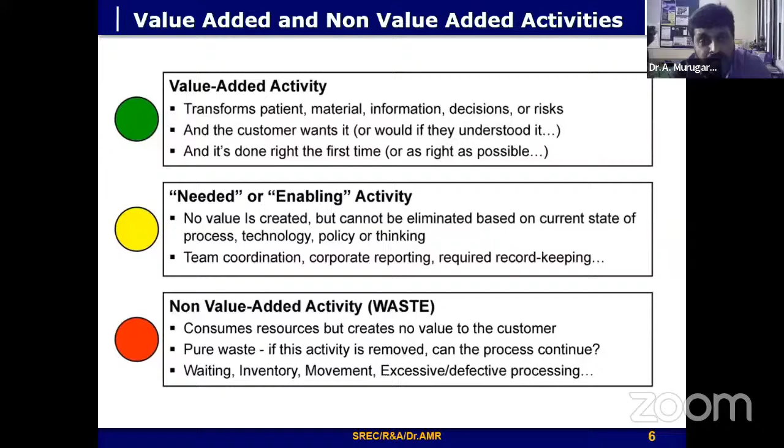Defects also. How are we going to avoid defects during your process, whether inline or in-process conditions, what kind of monitoring system, because unnecessarily a person comes to take a traditional way of making a measurement and inspection and making a report. These things are not value-added activities; they're non-value activities. It's always wastage. How are we going to minimize this activity when we take a list of processes, a list of steps involved in converting a raw material to a product? That's how we are going to categorize it.

As I told already, the pure wastages, you have to categorize into pure wastages. And the activities which transform directly into the product, maybe a shape or whatever, how you design and manufacture your component, are directly linked to the customer's point of view. The customer asks for a pizza with different flavors, maybe cheese pizza or something. So how the company produces directly whatever the customer wants.

They manufacture it just in time, it's collected by the Swiggy operator, and finally it reaches your place within 20 to 30 minutes. That's how lean principles can be used in Swiggy and so on. Then the other, incidental work, is maybe the technological changes and the thinking of sorting the steps involved. That's called incidental work. Generally these things are very important, but the thing is how we are going to minimize them. That's how we talk about value and non-value activities.

For example, we take the iron bar and store it in temporary storage. We want to machine it for some processes. It involves cutting, welding, milling, and painting, and finally goes to delivery. But the thing is, it is in the inventory. The customer needs only two components, two iron bars, but the inventory may be huge. So how are we going to categorize those activities? That's one of the major ones. That's where you have to start from.

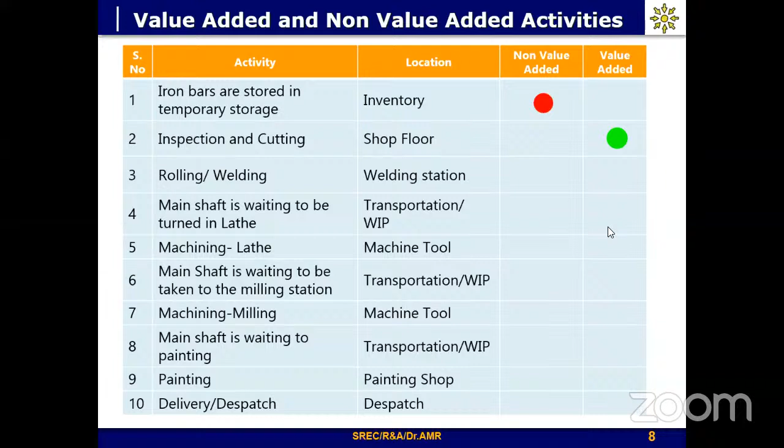That's why. Okay. I think you have to categorize into non-value added and value added activity. So it starts from the inspection, and cutting is a value added activity. Similarly for rolling and welding, whatever you have to connect it, that activity is also a value added activity. Then it goes to the next operation, so the particular component has to be waiting for some time.

Because the component we already pre-processed, we cut and inspected it and did some kind of welding, whatever the requirement. So it may be waiting; it maybe goes for the next operation, machining in lathe, but the thing is we have waiting time. So how are we going to minimize the waiting time? Waiting in between one station and another, or process one to the second process, that time and the cost is very important. How much time is waiting and relatively the cost involved, and also the number of quantities.

So based on this, that activity we call transportation or work in process, always called non-value activity. Then the next thing is machining on the lathe. Once it is loaded in the machine tool, the lathe, it's performing a job. It takes 3 to 4 minutes or 5 minutes. Once the job is over, that 5 minutes activity and the relative cost are called a value added activity.

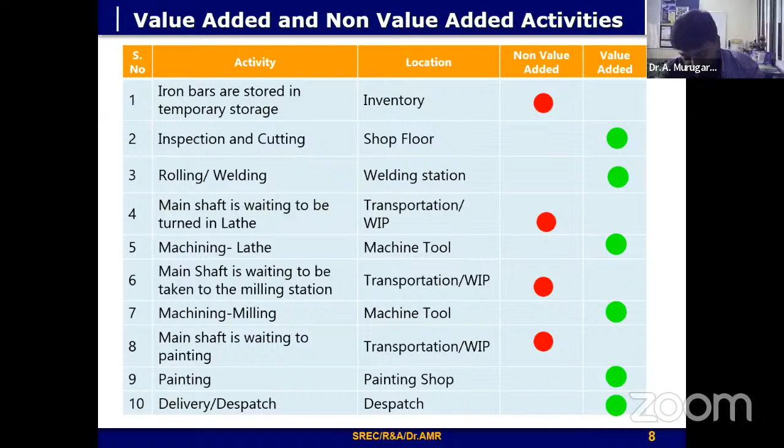Here I'm talking only from the inventory to the dispatch. So almost 4 to 5 non-value activities. But how are we going to reduce those activities? That's one of the major questions here. This is a simple example. Like that, whatever activity you are listing, you have to categorize into value added and non-value added activity, and work out what percentage is consumed by non-value activity. So come to it from this particular point of view.

So why do we have to go for lean? That's one of the major questions. Why, sir? Because of n number of technologies. If I want to go to Chennai, I can use my car, I can use a bus, I can use a train, I can go by airplane. I can go by any mode, but how? Which way should I go? That's why lean.

Because based on your cost, your time, and the resources you have, you have to choose effectively what's in your pocket. That's one of the major points here. That's why we're going for lean. There we have been talking about anything that adds cost to the product without adding any value.

But the thing is, Ford started in 1913 and 14 itself. Ford started with the synchronized way of assembling the Ford cars. They started, but they started in a different way. In the 1950s, Ohno from Toyota started with the lean principle: how we are going to manufacture your component while minimizing the waste. That's where lean came from, a method of making a manufacturing process more efficient.

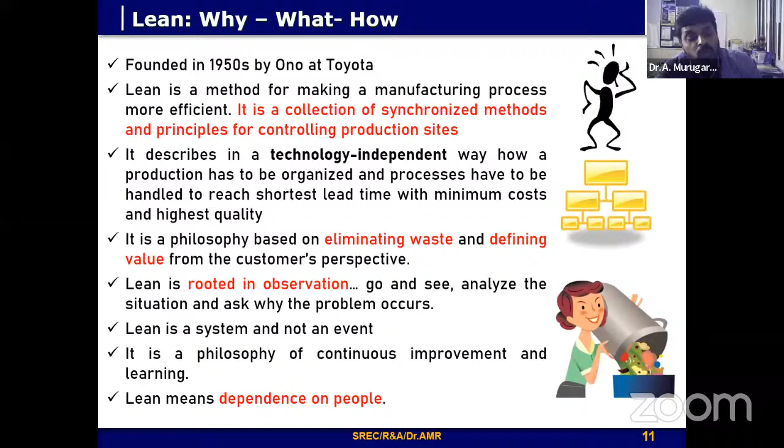So when you go with lean, it mainly depends upon the people. Whatever your technology, observation, methodology or tools, it depends upon the people how we use the lean principle in any kind of activity. There are a lot of stories. Lean manufacturing is a systematic approach to complete in the shortest cycle time, eliminating waste from the process. These are common definitions; n number of definitions are there.

But ultimately, it focuses on eliminating the waste. The main principles of lean focus on zero waiting time, that's very important, zero inventory, internal customer pull instead of push, and reducing the batch size. When you are scheduling, how you are going to reduce your batch sizes and process times, that's mostly what we have to talk about. One of the major problems here is when we go to industries, studying and observing their process, we want to run some kind of automation.

Suddenly the people who are working there, they want to remove their people. So that's what eliminating the people means. The problem is, recently I have visited some of the companies in Coimbatore. There they have been talking about 4 to 5 people working on dispatching and loading some of the components. But they need assistance of some kind of machines to reduce their work. So they're thinking a different way, and we have to implement some kind of low cost automation, because the industries are mainly looking at low cost automation, because they cannot find the people.

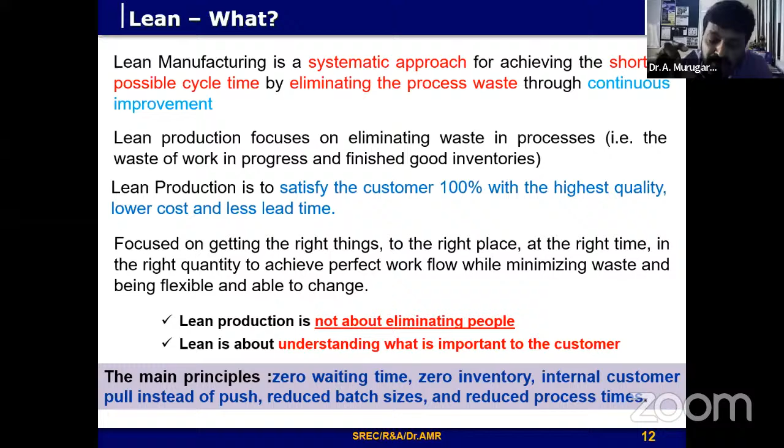But ultimately, lean manufacturing is one of the thumb rules for most of the industries. They started 3 to 4 decades ago and they're working on this, but there's still a long way to go. As I told, only 1% to 10% of industries have started working on lean manufacturing, lean automation and Lean Six Sigma concepts. Okay, come to the

When you're talking about the optimist point of view and the lean manufacturing point of view, the optimist always says the glass is half full. But the pessimist always says the glass is half empty. But from the lean thinking point of view, we always ask why the glass is twice as big as it should be. So from the lean thinking point of view, you should think in this way.

You have to start observing the existing system. You should think about minimizing your waste, because you are consuming only half the amount of water. So why can't you manufacture a glass with a size of 10 ml or 15 ml or 200 ml? If we take a 100 ml glass and the person is only consuming 60 ml, the remaining 40 ml of the glass is wasted cost and resources. So this is where you have to start lean thinking to implement in any kind of process.

If you go to any food industry nowadays, they're talking about dosas also. Dosa sizes are varying, at the same cost, but they're making them differently. So this is what they started on. Just one example like that for the manufacturing industries: they're looking at fixtures, single minute exchange of dies. There are so many exchangeable dies and just-in-time concepts they implemented. This is the way they're talking about lean thinking.

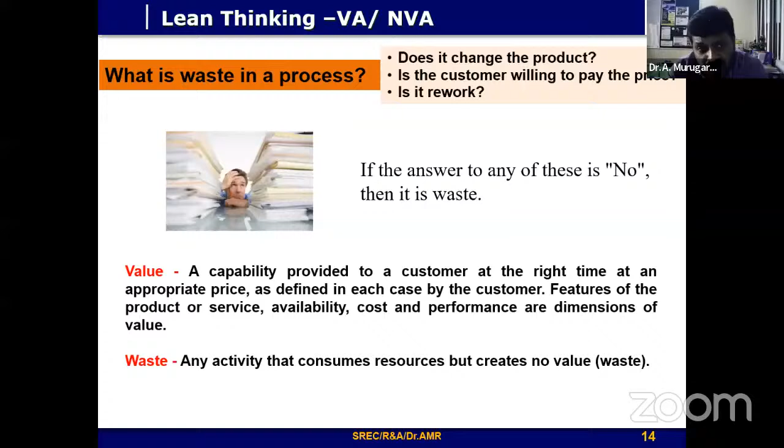So we have to talk about this waste in the process, when talking about value added and non-value added activity. As I told you, we have type 1 and type 2 activity when I'm talking about the non-value added. Type 1 we can eliminate immediately, but type 2 activity cannot be eliminated; we have to analyze, study, observe, and finally reduce. That's why we have to categorize the non-value activity.

Generally, the thumb rule is that whenever we look at the process time of any component, 95% of the total process time is non-value added activity. How are we going to reduce this non-value added activity? Minimizing your wastages is one of the major ways.

So there are different kinds of representations of value added and non-value added, from my perspective: valuable effort, cost, time, money, its value. Sometimes we have to categorize into totally pure waste, maybe less effort, but how are we going to minimize its waste? That's the way they categorize into value added and non-value added.

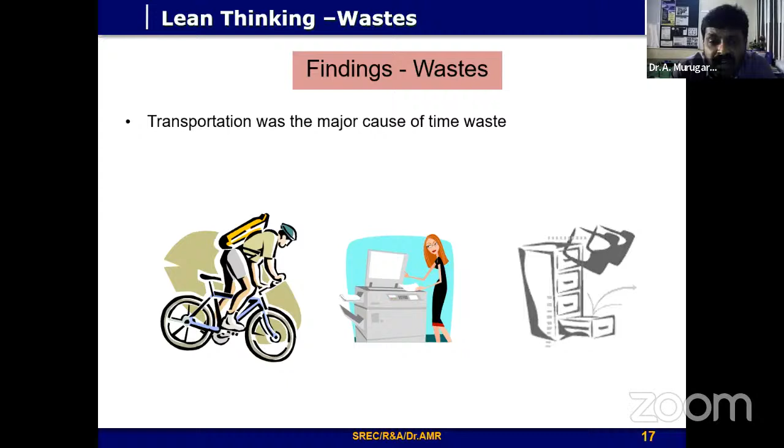Okay, so come to lean thinking. How are we going to find the wastages? That's one of the major questions here. When we are moving material from one location to another, the major time is the person who's handling, the person who's transporting, and the time spent by the person. Because the cost is involved for the labor, the material movement, the machines, transportation is a major thing when talking about wastage. You see that example most of the time.

Yeah. So, as I showed in the previous example, most of the time transportation is the major cost. And the duplication of hard copies and filing wastes paper, staff time and storage space. This is one of the major ones, even in our career, in the education sector also: the duplication of n number of hard copies.

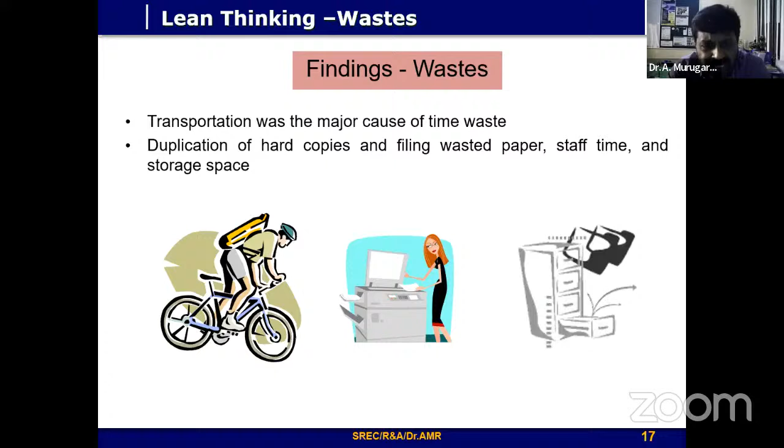So think about the paper wastages, and how we are going to implement the entire e-paper concept. Whenever you need, you have to take it from the different reports and other things where you need it. Otherwise, you take it from online itself. That's what they're talking about, the most important way of finding the waste.

Okay. So the next thing: we generally call it 7 wastes, but now most industries have added one more waste, underutilization of people. This is also one of the wastages, because we are not utilizing your people properly, if we are talking about lean thinking. Then generally we have overproduction: the customer needs some amount, but we are producing more than that. That's called overproduction.

Inventory is one of the most important factors. Then, as I told, waiting time, motion and transportation. Rework is somewhat okay, but we have to design your components in such a way that scrap can be handled differently and used for other purposes. Rework is also another important one. If you produce as per your design, there may be possibilities of rework, but it's less time, fewer things only.

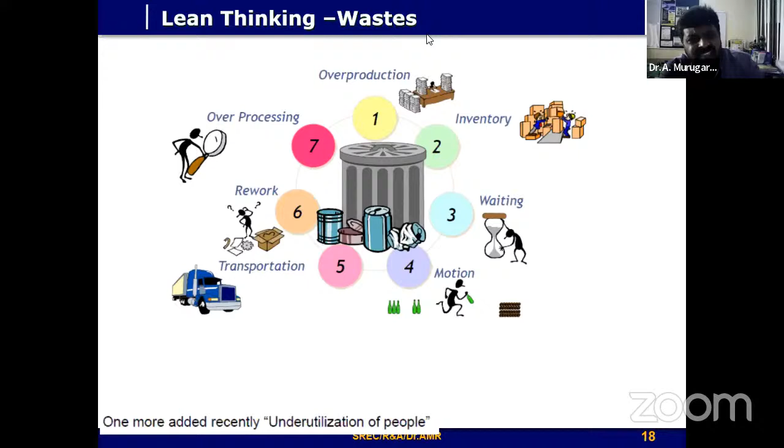The other one is called over-processing, another important factor when you're talking about lean thinking in wastages. There are generally 7 wastages. We can say 7 mudas also.

When talking about lean thinking, or lean manufacturing, work study comes into the picture because in work study we want to identify the unwanted elements and unwanted time spent in your process. That's the common ground between lean manufacturing and work study: the motion involved in processing steps, utilization of people, time spent waiting for components to be processed, and transportation time.

Apart from that, lean manufacturing also concerns overproduction, inventory storage, and number of defects, which are not directly discussed in work study. In work study, we mainly focus on time and reducing the unwanted activities and elements present in the system. Work study is one of the major processes used in lean manufacturing.

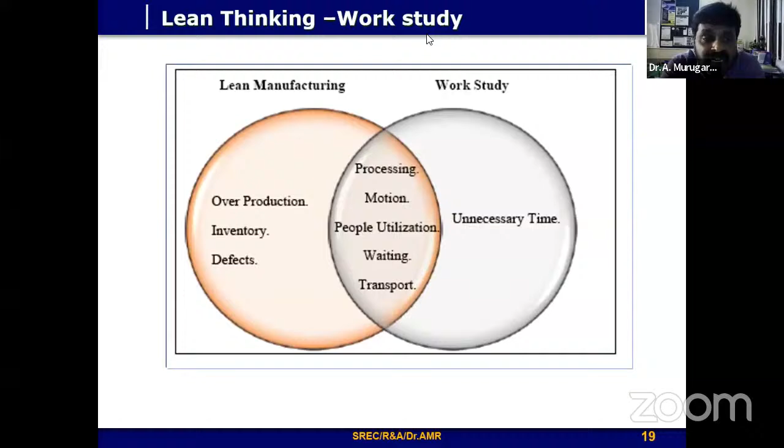This is one small video showing how lean management and lean principles can be used in a business, for example a food industry business that is doing well and thinking of expanding. That's great, but it's also the riskiest time for a business, since many businesses don't survive the transition.

Should you throw money at the problem by investing in new equipment or hiring more people? Should you make your staff work more overtime? Your answers to questions like these can make or break your business.

And that's where Lean comes in. Lean is a philosophy about delivering value from your customer's perspective, eliminating waste, and continuously improving your processes. Lean can radically change the way you do business. Lean management is based on four principles. The first principle is pull: rather than producing as much as possible, customer demand pulls goods or services through the manufacturing process. This minimizes overproduction, inventory, and ultimately working capital.

The second is one-piece flow. Focusing on one single piece at a time minimizes work in progress, process interruptions, lead and waiting time, while increasing quality and flexibility. The third is takt, the heartbeat of a lean system. It's how fast you need to manufacture a product to meet customer demand. Takt allows us to balance work content, achieve continuous flow, and respond flexibly to changes in the marketplace.

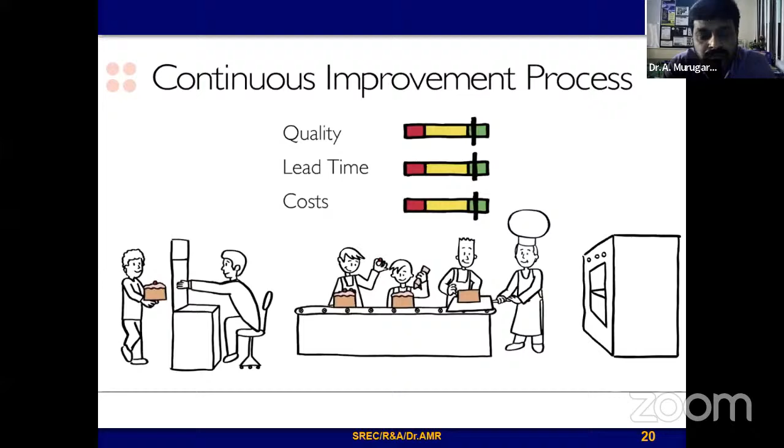And the fourth is zero defects. Mistakes happen, but a lean company doesn't pass on defects; mistakes from previous steps must be fixed before going on. Combined with a robust continuous improvement process, the four principles of lean management will help your company stay ahead of the competition in a constantly changing marketplace. So if you're ready to begin your lean journey, contact us today.

So this is just one video to help you understand lean manufacturing. It covers overproduction and how you achieve one-piece flow in producing your product, and how you reduce wastages based on how you fix your machine tool. For example, if I want to machine a 5mm diameter part, I can't use a big machine tool; instead a small machine tool should be used to fit the manufacturing need.

So you have to schedule your activities to fit whichever process suits the need of the customer, whether the customer expects high accuracy or a high precision component. Based on the requirements of the customer, you have to design your layout and system. That's what most companies nowadays look at in this particular aspect.

For example, we have only a small space, even in construction companies we have a small space. How we are going to construct depends on the requirements of the customer, whether it's 2 floors or 3 floors, so you have to fulfill the requirement of your customer and design the layout accordingly. I have already constructed a number of houses this way.

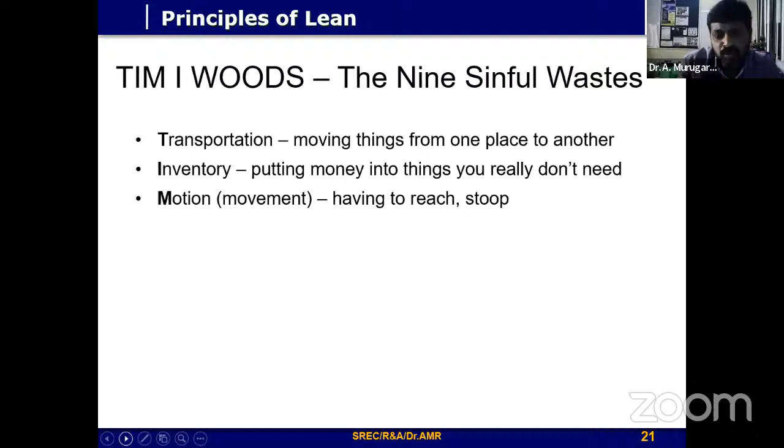So that's one of the major principles of lean, when we are going for lean in industries this is a major one. Nowadays they're talking about vision systems to capture movement, and finally it may be converted to automation. When you're going to make automation, the motion, how we use our hand to do the operation, instead of that robots, that's where robotic lean automation comes into the picture. So robo-motions are mostly using our hand aspect, they are making this happen.

But the thing is the inspection has to be visual, with a single orientation, so how many observations we can make using your camera. Even though the cost is involved, if you make the entire investment in cost, the end result may increase your productivity and minimize your cost. The initial investment cost is very high, but in the end result, the cost of production will be minimized. That's how they talk about inspection, because the rejection rate needs to be reduced, and we can easily identify defects, with which we can go for rework or reuse.

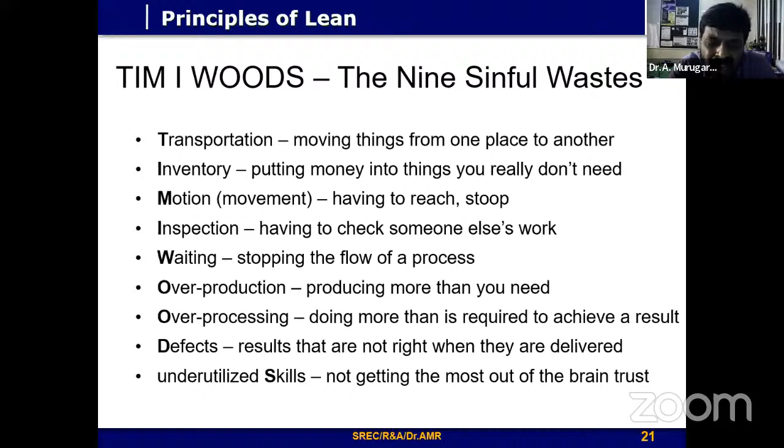Then the final one - underutilized skills. Whatever we've been talking about regarding implementing lean, the major problem is how we utilize the resources of the people. Lean mainly addresses this, and underutilization of skills is very important. How do you trust your brain, because we're developing the system, producing, designing - but how does it affect the end result, how do you fulfill and satisfy your customer? As a producer, you should think from the customer's perspective.

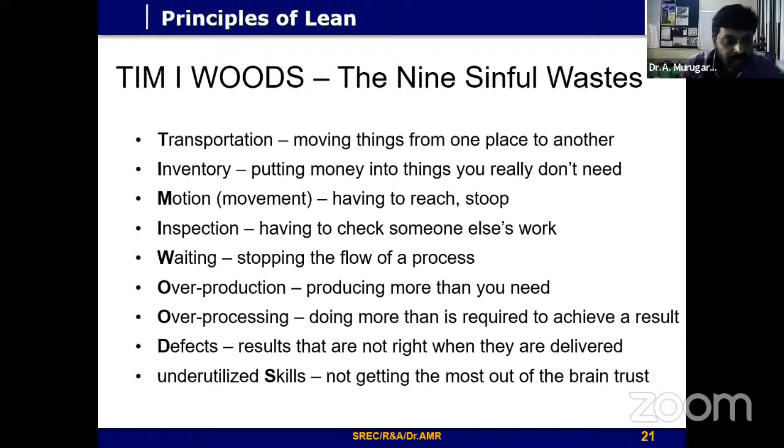So these are the 9 sinful wastes - generally we're talking about the principles of lean. Next is the same concept already discussed when talking about principles of lean: the 9 sinful wastes, also called the 7 Mudas or different types of waste.

As I mentioned - defects and rework, transportation, motion and unnecessary walking, waiting and searching for the right component or finding the component to load into the system, inventories not properly analyzed, overproduction, and ineffective processing. Sometimes the process is under or over processed, and in those situations we cannot go for rework. That's how they look at the principles of lean from the 7 Mudas point of view.

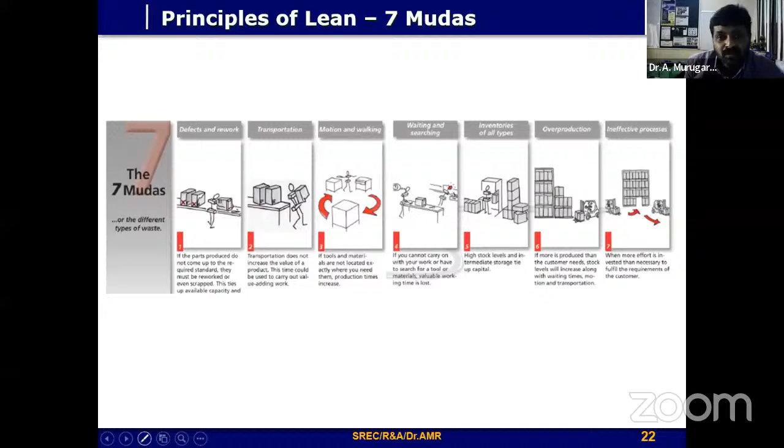The same principles - transportation, inventory, motion, waiting, overproduction, and over processing - because sometimes the same process gets duplicated. For example, if you're making a turning and drilling operation, instead of completing the drilling process separately, you can couple the turning and drilling process together. Otherwise you end up waiting and repeating operations unnecessarily.

Then defects and skills - one of the major issues here, because underutilization of people's skills, and people who don't listen, cannot correct their mistakes. These are among the major problems when looking at implementing lean.

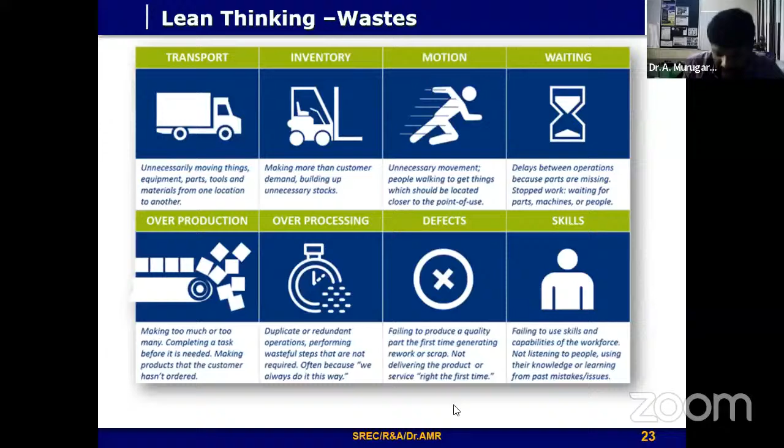So the next point is the same aspect. I'm repeating this slide because from the industry perspective, in today's technological Industry 4.0 context, most industries focus on transportation and motion, and another important thing is waiting - because processing, inventory, and overproduction depend on each and every company.

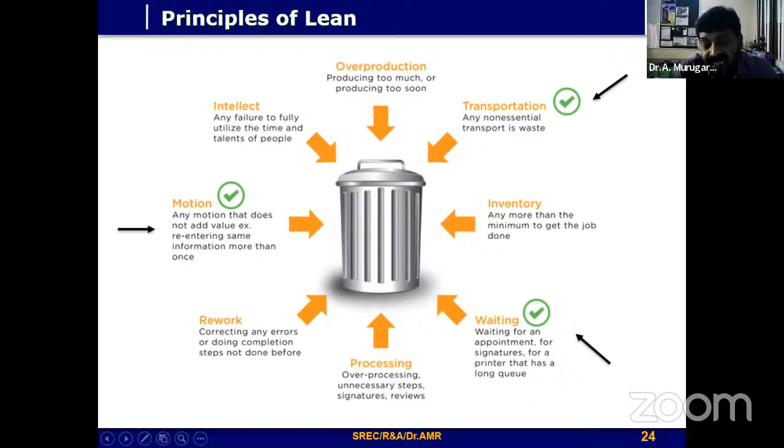But the thing is, most of the time, wherever you are doing any kind of activity, transportation is involved and motion is involved, and the time for waiting is another major one here. So how are we going to minimize these things? These are the 3 major points we have to consider when going for lean deployment in the industry: transportation, motion and waiting period.

For example, see the person who is ordering some kind of burger. What are the processes involved? What does the customer have to pay for this burger? Because the burger is around 60 or 70 rupees, so the person makes a profit. But what are the things there? He has to get raw material, then supporting accessories and electricity, then the person who's inspecting and taking the order, then you have to invest something in advertisement. So many factors are involved.

But which critical factor significantly affects the cost of your operation? Operation cost is what you have to look at, where you have to take your cost, and other aspects like whether your employees are trained or not. Then among this you are going to make your profit. So starting from the burger itself, n number of shops are coming up nowadays on each and every road, but how are they making a profit on each and every burger?

Sometimes small mobility vehicles are coming into the picture. Instead of renting the shop, decorating all these items and wasting money, how about mobility? So now they're thinking in a lean way to attract the customer: you don't want to come to our place, I can come there. From your place you can order it. We can prepare it. We can give it to you freshly. So like that they started.

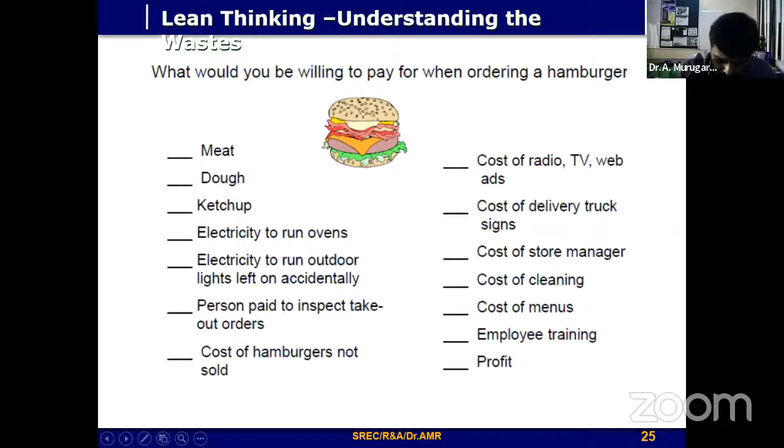There also, if a nurse is not available, automation systems are coming into the picture. They install a lot of temperature devices to check your temperature. Then it's reported to a page, not in printed format. Nowadays doctors are using a tab: once you are registered, they scan it, it goes to the report, and when you enter and say your name, it automatically displays all your items. Then taking all this information, they give you a prescription. So the lean way of changes is happening.

So these are the wastages and their types. What are the causes of these wastages? Then what are the symptoms? Because mostly when we talk about wastages, they range from overproduction to unnecessary over processing and underutilization of labor skill, everything comes into the picture. Okay, so this is what we mostly have to concentrate on in this particular dimension.

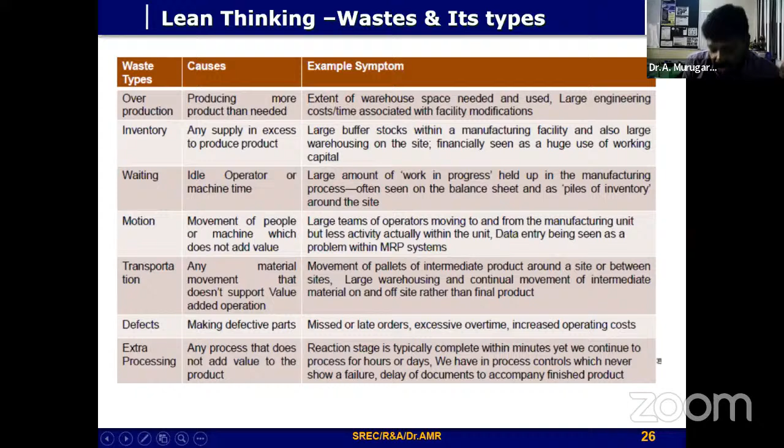So from the lean thinking point of view, you always have to define the value, because you have to identify the value of what the customer expects, what the customer expresses, and you have to map the value with your process, and wherever it is possible to eliminate, you have to eliminate it, and finally you are going to create the flow. In the flow you have to identify what steps are involved, making a smooth flow of your process without any delay, and you have to push it to the pull system where the demand occurs, then it may be serviced. Then you have to go for perfection.

So once you are established, you have to establish your pull system, because based on your order, you have to start your process. Then you can service within the minimum time, just in time, the minimum time at which you have to prepare it all. Because if you want a burger, you have to have your bun and other elements to be cooked. Then finally you have to process it. If the customer is asking for a burger with cheese or a burger with chicken, you have to have it all ready.

At this time the quality is also very important, which you have to look at. And finally, you have to serve the person within 3 minutes or 5 minutes, where the customer is expecting good quality and lesser lead time in getting their product. This is mostly what they're talking about from the lean thinking point of view.

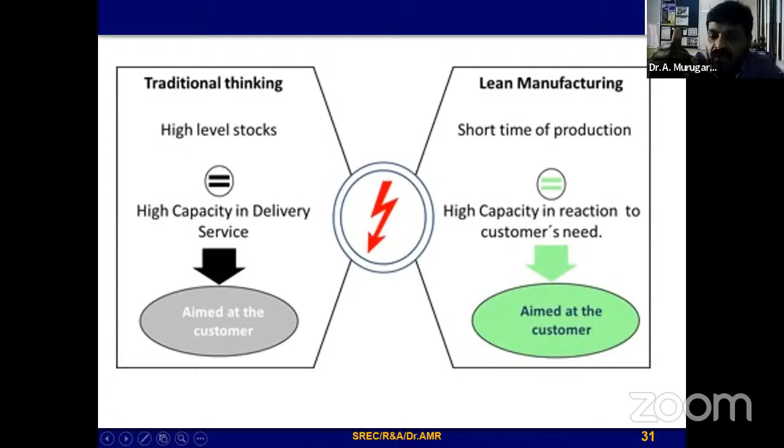That's what we're talking about here. When talking about cost, the cost involves activities which are essential, value added, and waste. So by minimizing your waste activities, you can get your maximum profit. That's what they're talking about in the cost reduction principle. In traditional thinking, we are not aiming for the customer, we are only looking at what we have and how we are going to sell it to the customer. But in lean manufacturing, we are aiming for the customer, reducing the time and the way we use our system, minimizing the wastage while fulfilling the customer expectation.

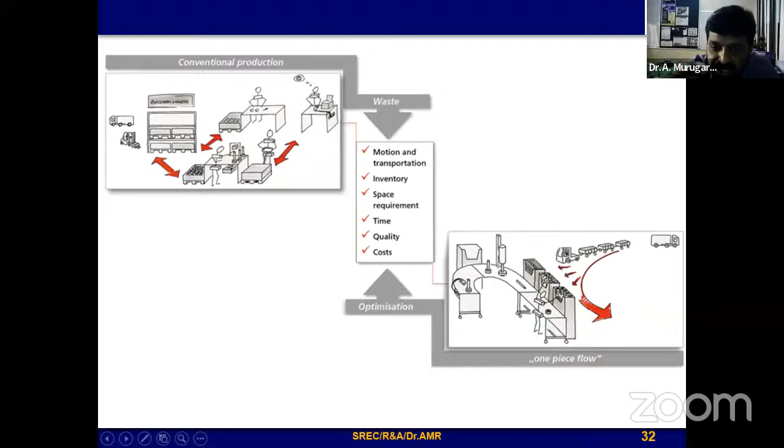So that's the conventional production system, where each and every station is individual and independent. But the thing is, what happens when you are moving from one location to another location? Instead of that, your labor should be changed according to your requirement, based on how you are going to optimize your workflow, your motion, transportation, inventory, space requirement, time, quality, and cost.

So far we discussed the principles of lean, but finally, coming to how we are going to implement lean, that's how you're going to make a lean deployment in industry, in particular, what are the various lean methods and tools.

I think I have somewhat touched on all these concepts, but these are the major methods which have been used in most of the industries, maybe with a combination of these, or maybe some specific method from Poka-Yoke or SMED, single-minute exchange of dies, depending upon the industry. They have a combination of all of this.

Now each and every industry is looking at it from a different perspective. I went to some industries, like Craftsman Automation in Coimbatore. They may be focusing on the Kaizen principle, change for better. So if the process is going on and the changes are for the betterment of your productivity, they immediately ask to change the process. That's the way they started.

Every week they ask the people to discuss. Suppose I'm placing a tool here, instead of placing it in the particular station for use in the next one, you have to change it immediately, like that. They started change for the betterment. So that's the way they are using this principle. Every team is working on this particular aspect.

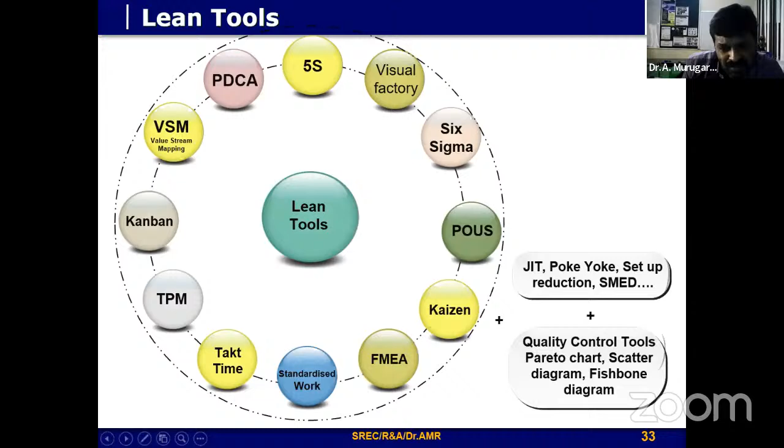We already talked about that. VSM and Six Sigma are now emerging like anything. TPM is also included in Six Sigma. That's not a big deal, because total productive maintenance already evolved a long time before. So the concepts we are talking about already happened a long time before. So these are the various tools when talking about lean tools and methods.

Standardizing the work, that's the work study: breaking down your jobs into a number of elements, examining them, and finding out which one is an unwanted activity. That's what work study does here. It's a combination of method study and time study. Then workplace organization, the 5S concept: sort, set in order, shine, standardize, and sustain. Most of the industries are already using the 5S concept now.

But still, the problem in India is proper training and the visual factory. Now, with Industry 4.0, these are all being done in a different way. My next slide will talk about Industry 4.0 and how this all comes into the picture. Then point-of-use storage is another important factor here.

Most of the time, the location of parts and raw materials is the most important, and their proximity to your process station is very, very important. Most of the industries are struggling to identify the location of parts. That's why nowadays they're talking about a lot of scanning systems at different locations, so they can see where the particular product was ten minutes ago. Like that, they easily identify it using a number of smart sensors.

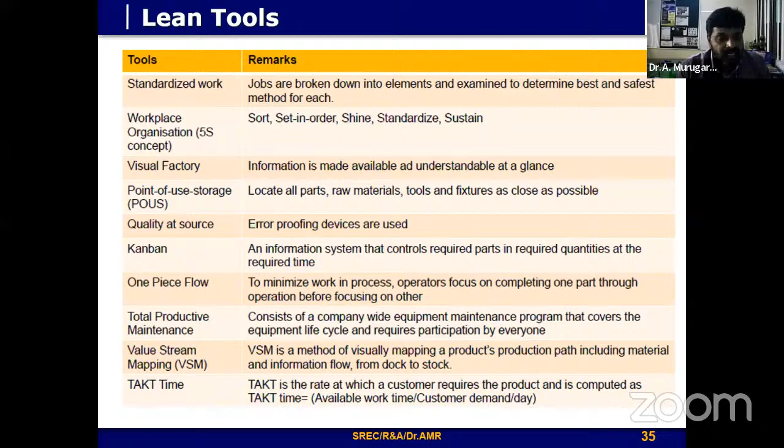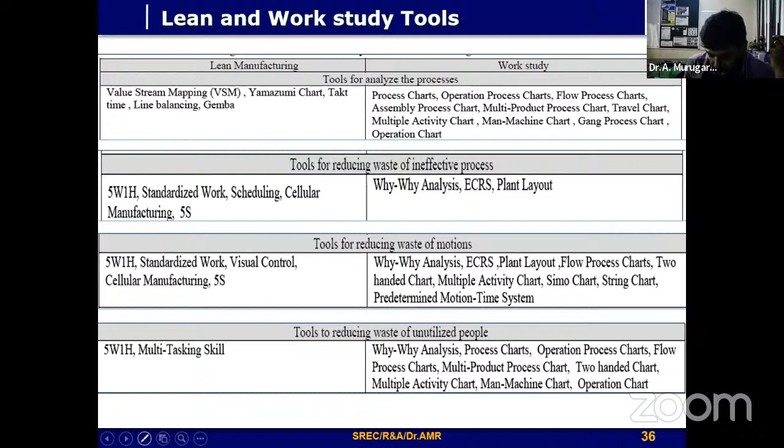Okay, so that's what we're talking about with lean manufacturing, combining it with work study. So the tools for analyzing the process and tools for reducing your wastage based on the different principles in lean manufacturing, in work study, and wastage of motions. Similarly, you can use 5S concepts, and you can use different process charts and tools for reducing your unutilized people. So those are also important working concepts, along with why-why analysis and process charts.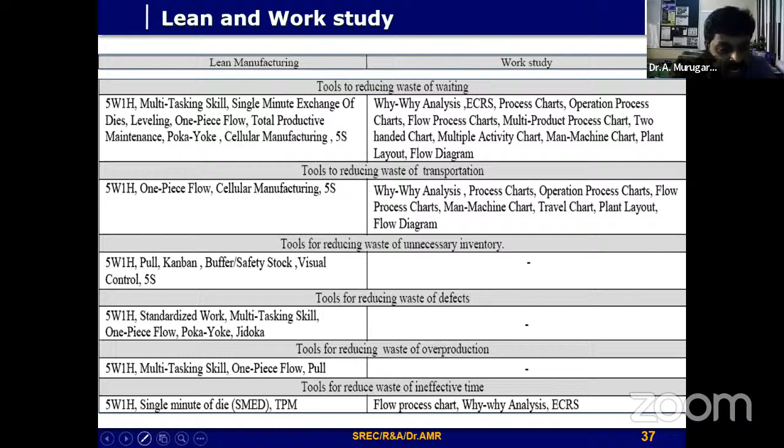So if you're comparing lean and work study, how are you going to reduce your waiting time, your transportation time, your unnecessary inventory time? So like that, we can use any number of lean concepts like Poka-Yoke, one piece flow. So like that, they started implementing the concept, in particular zero defects, zero maintenance, TPM, and jigs and fixtures, exchange of dies come into the picture.

So the lean tools are 5S and visual management tools. I think most of you already know about these concepts. The 5S tool: sort, set, shine, standardize and sustain. Then the other important tool is value stream mapping: the information flow, material flow, and lead time between your processes. This is how we reduce your lead time and your process time for delivering to your customer. It's a holistic approach to the entire current state system, because it indicates where the wastages come into the picture.

So value stream mapping is an important one. Everyone should know it; those who are working from a research perspective, in R&D, are most of the time working with VSM. A lot of software is available, and we conducted some lectures on VSM alone, 2 to 3 days of training.

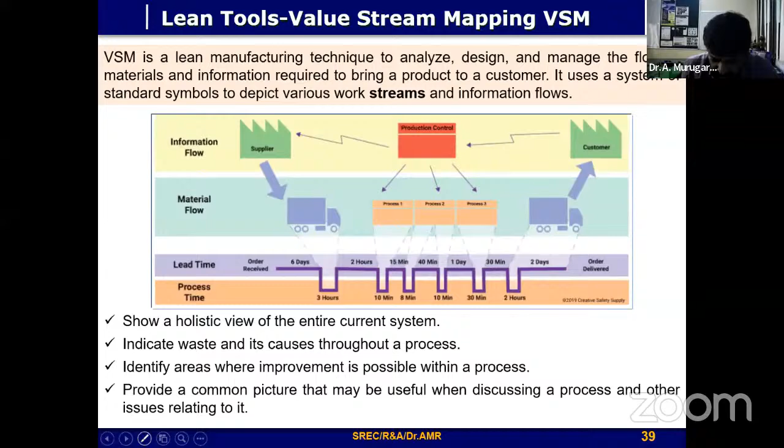Then takt time calculation is also a very important one. How are you going to balance your takt time? It relates cycle time to the time at which we deliver the end product according to customer demand, based on your available working time and the customer demand. These takt times are calculated in the value stream mapping between each and every process of your workflow.

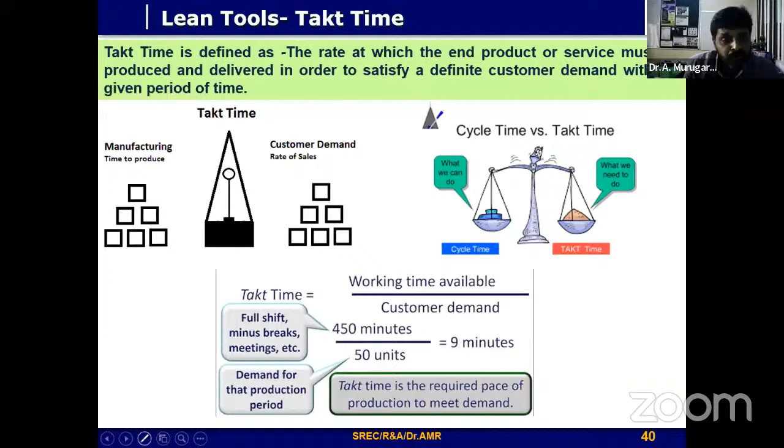Then the next important thing is how we are going to implement lean. There are 5 steps involved: collect the data, analyze the data, design the change, make the change, and measure the benefit. Collecting the data is first, because observation comes first. The next stage is analyzing the data; when you're working with the cross-functional team, you're always talking about the undesirable effects. Sometimes they may be unwanted activities, and you have to find them through the cross-functional teams.

Then you have to design the changes and make the changes by giving the appropriate training. This is one of the major problems. In most industries, training and maintenance are a major issue. Then you have to inspect and measure the benefits of your change.

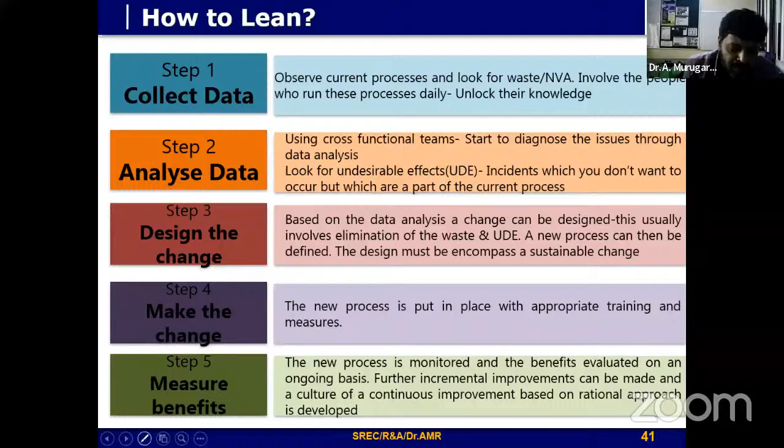So how lean can be sustainable is a major question, because when industries look at the lean system, the rules and tools are very important, and lean starts with the rules, not tools. That's very important, as I told you already. The tools are always there, but the thing is how you are going to frame the rules. There are 4 rules generally discussed here. You always have to structure your activity and know each and every activity.

Suppose I want this color, this particular tire size, this particular dashboard component in the system. So like that, based on your customer need, one piece flow. Each and every component is manufactured accordingly; suppose product number 1 in station 1 is from supplier 1, and product number 2 in customer station 2 may be from supplier 2. It depends on how you connect the customer and supplier point of view. That's very important.

So you have to be very clear on this, and specify and simplify each and every flow, and improve through experiment at the lowest level possible, because this is very important. As much as possible, we make it very easy for your system.

That's what structures every activity: clearly connect to the requirement of your customer, internal or maybe external. Then rule 3 is very simple: you know the flow of your material, information and product. And finally, improve through experimentation.

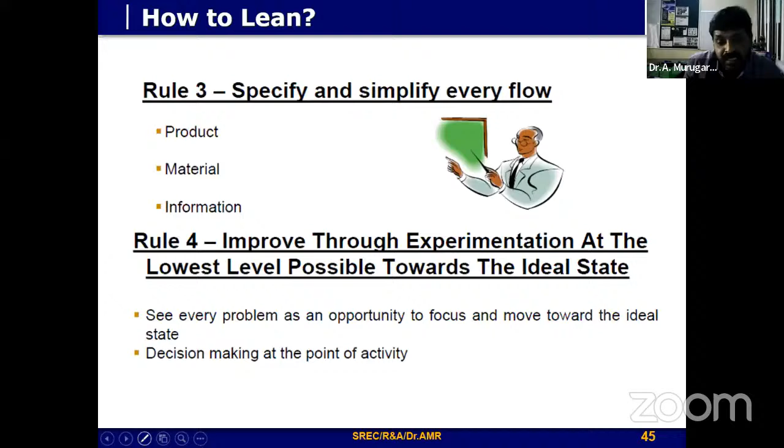Sometimes every problem is an opportunity to focus and move you towards the ideal state, because the decision making in each and every activity is already made, because you have to wait for your superior. So at each and every stage you have to discuss and finalize. We have to focus on the benefit for your customer.

So there are various pros and cons, but generally with being lean, a lot of benefits are there, from a financial point of view and a customer quality point of view. But when talking about resisting lean, you need cultural changes, because this is one of the major problems. Most of the industries, wherever they're going, are always looking at compliance with the system. So these are the various benefits of the lean system.

Then when you're talking about lean transformation, generally we say tools are only 10%, but the remaining, as I told already, is cultural change. We have to come from this particular perspective. So I'm sorry, I'm going a little bit late, because there's a major point I want to discuss here.

So when talking about lean deployment in industry, whether the company is small or not, how are we going to make a lean process improvement? If the company is in a servicing business, or the company cannot afford lean process improvement? It's a very basic question, but all of these industries can use lean. Any industry, even a small shop, can use the lean principle. But we have to study and observe.

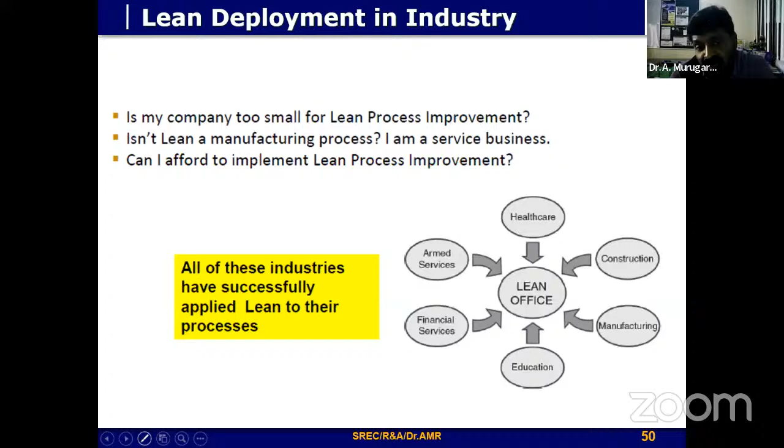Most small business vendors nowadays are coming in as road shops. You can see there are a lot of mushroom players competing; they studied the existing system, how to minimize their waste or minimize their activity to better serve the customer with better quality. That's what they're trying most of the time.

There are a lot of stages of implementing lean in industries. The standard thing is, first you have to identify the root cause through analysis, then use these particular tools, study it, measure it and inspect it. Then you have to standardize and finally go for verification, and finally the result from the end customer point of view.

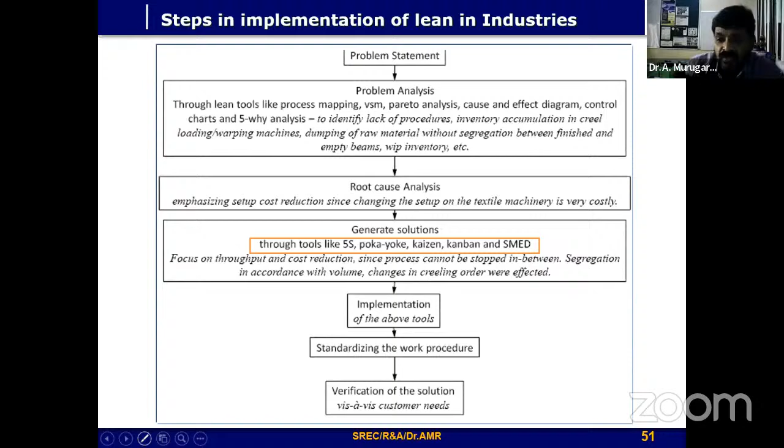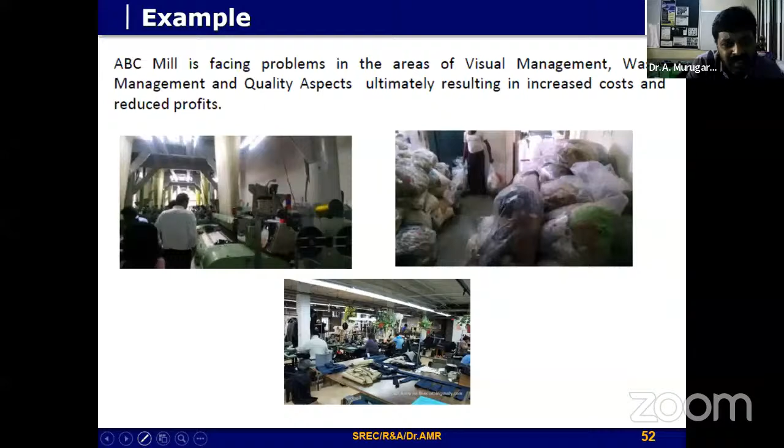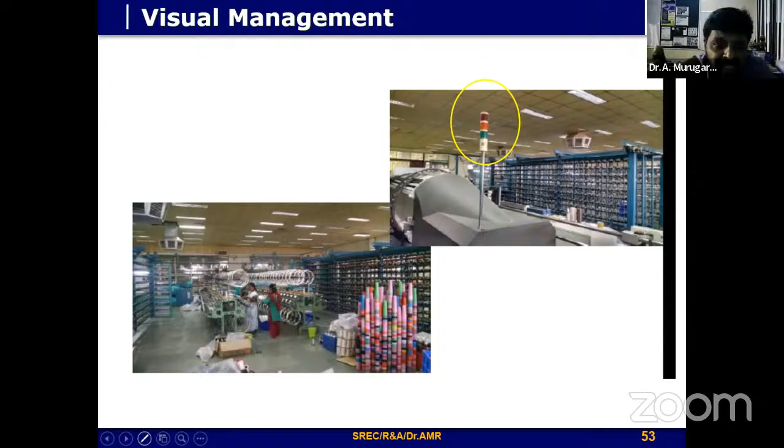So we have connected with some of the mills in Coimbatore. They tried different kinds of aspects. There are a lot of quality issues, but they're changing with the visual management aspect. In local mills, whether the machine is running or not, or whether there's any failure, the indication of visual management is the major one here. Visual displays and visual controls are among the major ones most industries are looking at, in particular the textile industry.

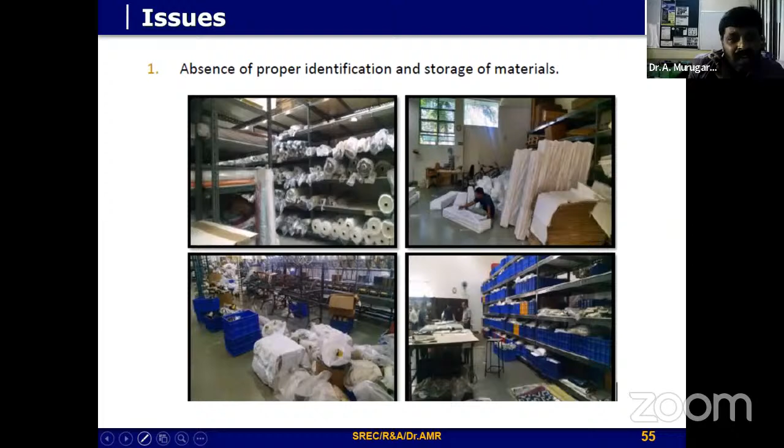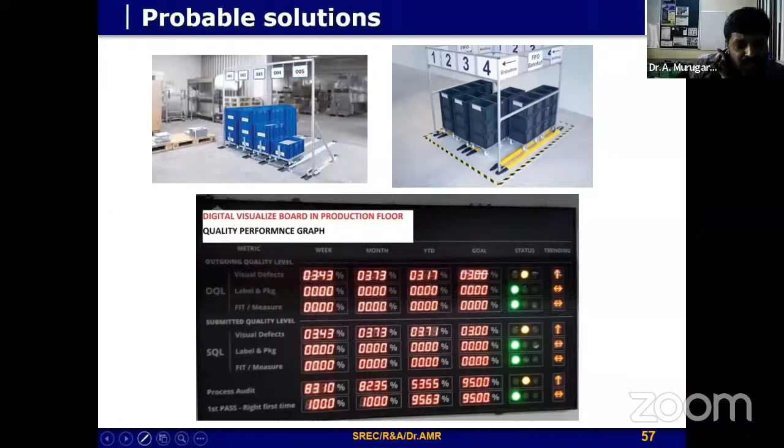We've done some studies on these particular industries. Then categorizing the storage of material using the 5S concept, using labeling, identification of storage, and digital boards showing how much quantity and how much visual impact happens. These are very important aspects when you're going to find solutions for any industry using visual controls or 5S concepts.

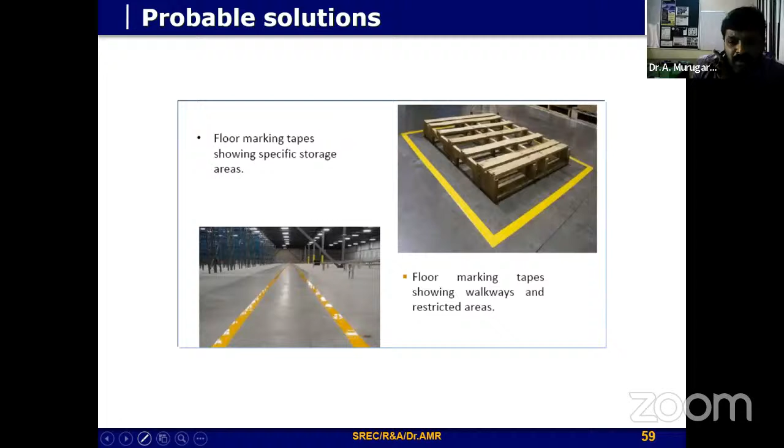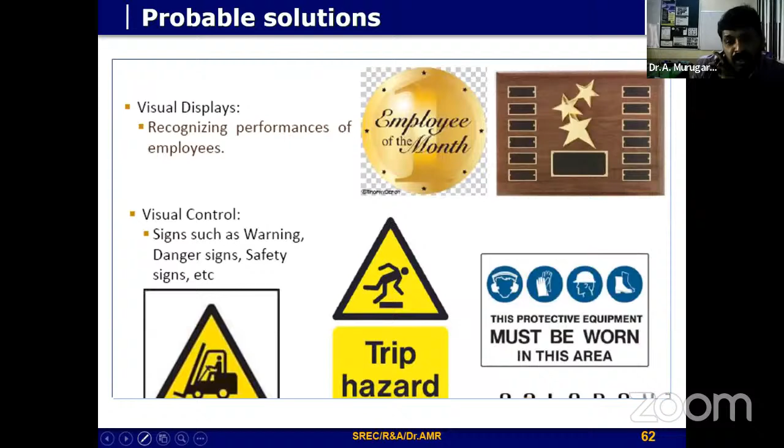So these are the various color codes for identifying your materials and storage, to locate them with proper floor markings, walkways and restricted areas. Like that, they have to start finding the issues. That's why they're using the 5S concept, and you can use visual controls and visual displays to ensure employees are doing things properly, with awarding, appreciating, and proper training. These are very important ones.

Otherwise, the next one is changing the design. By changing the design you minimize your defects, and handle any variation or fabric changes. So these are the critical factors we have to identify, and you have to change it from the design.

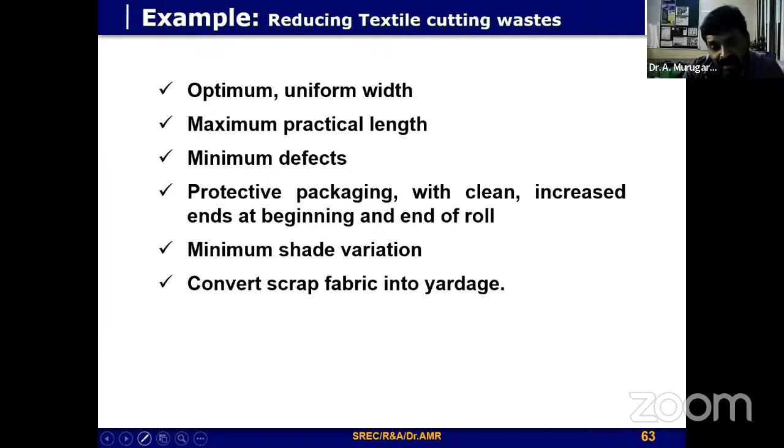When applying to the textile industries, we conduct some basic things, but they are tough to implement. We submit the report, but whether they implement it or not, we don't know. But we tried some basic things connecting visual management and 5S concepts.

Now comes the most important topic of lean automation and Industry 4.0. Everyone knows it starts from Industry 1 to Industry 4. Now we are striving towards Industry 4.0, where we talk about cyber physical systems, integration of all networks, sensors and actuators, connecting robots for decision making without human intervention, putting all system information into a dashboard to monitor entire activity and control over the entire production site.

That's why this new paradigm shift is happening. There's an old concept of computer integrated manufacturing, but now we've moved through modern information and communication devices - ICT, Information Communication Technologies - using modern technology to integrate automation technology into lean manufacturing. Due to the current availability of technology like smart sensors, smart actuators, and smart machines, we have to integrate ICT into our systems, enabling activities, increasing productivity and quality, while minimizing cost.

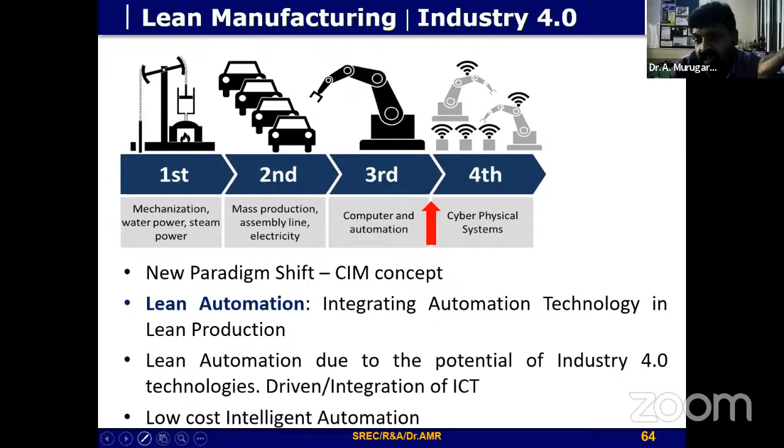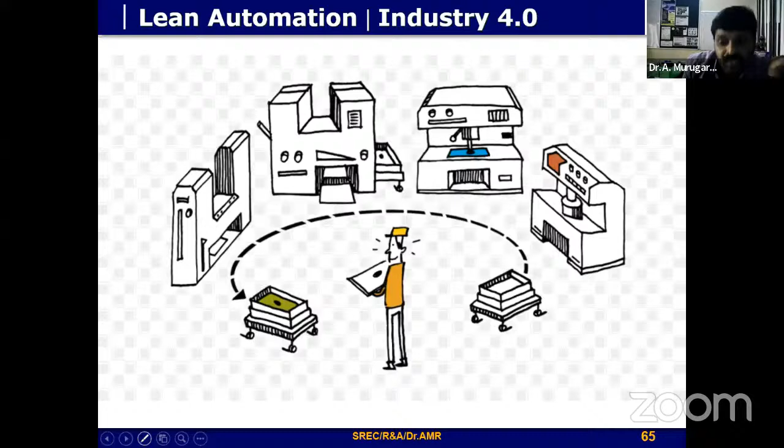Similarly, this kind of technology helps you. Lean automation comes into the picture here with autonomous mobile robots, autonomous arrangement of layouts in sequence, where we can perform all jobs in a single take to get the end product. That's what industries are now looking at - how to effectively minimize human intervention, minimize transport, minimize motion, controlling it through the robotic way of lean automation.

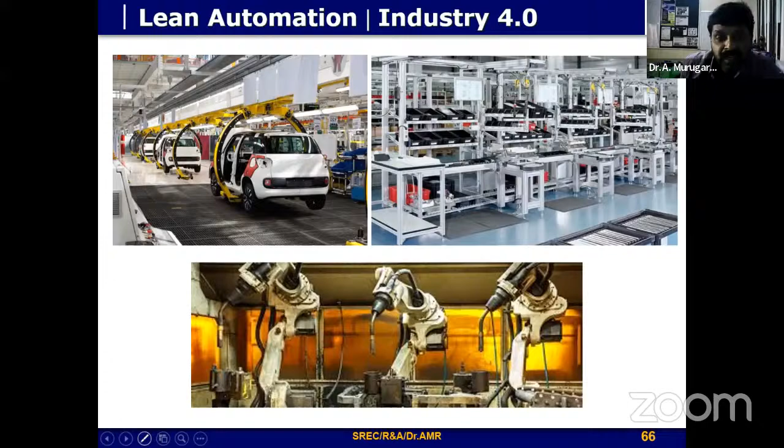As I mentioned, the connectivity between human development with respect to performance - initially we'd consider the process including value added, non-value added activities and Muda, but slowly we moved into lean manufacturing, concentrating on the traditional way of reducing unwanted activities. Then it goes into lean production where automation and semi-automation are involved, and all non-value activities are reduced.

Now we are using the industrial IoT platform. All smart sensors give you information about defects, movements of material, and the location of all parts dynamically with the current state. This easily lets us reduce all non-value added activities, increasing performance.

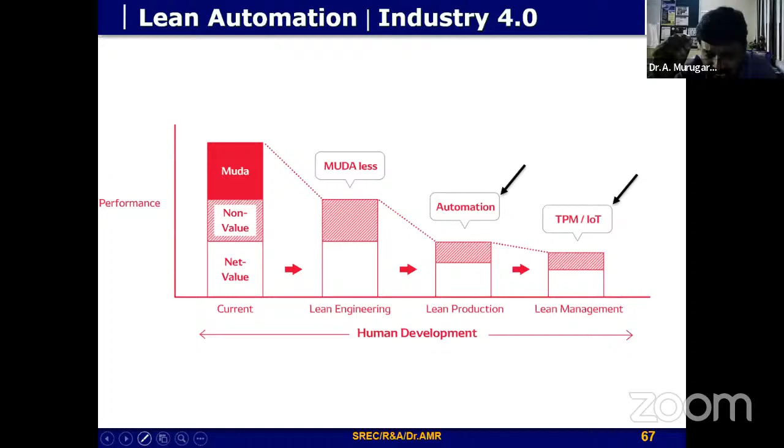So whatever value you give your customer is directly linked to customer support and satisfaction. When talking about implementing lean automation, you always have to look at the process and figure out how to integrate it.

That's about the first one. So how we're going to connect it with fulfilling your customers' needs first, because when you focus your automation, you have to always create what the customer needs, and how we are going to design your automation.

So we cannot fix with a simple, fixed system. Instead, a flexible system is needed. If customer needs change, how are you going to change your automation system? That's the first and foremost important thing.

Look at the processes of how you are able to integrate your operations based on your customer needs, and also the possibility of change according to your customer expectations as they vary. So how do you build flexibility into your automation system? For that, what kind of smart machine tools or smart systems are we using in the process?

Examining this is one of the major things, because people who create the automation process always face criticism, because they think minimum human intervention means we are going to eliminate their job. But the thing is, even the person designing your automation, their job career will change into the design of your automation systems.

So in such a way, you identify the people, then share their experiences of how they're going to be involved in that particular process. Maybe you can add your consultant also to ensure how people think about the automation process, and finally how we are going to train them and keep them valuable in the system.

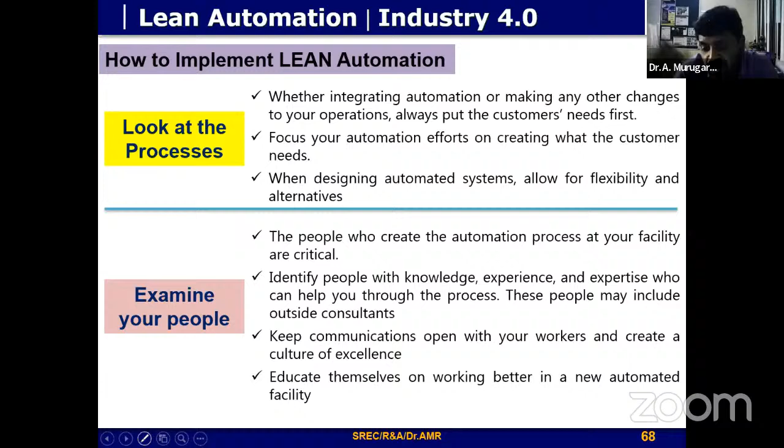New automation facilities are created by a number of industries, but the thing is, they are not educated properly. That's one of the major problems here. So how are we going to make these cultural changes in your work environment? That's one of the major problems when implementing lean automation.

Then the last important thing, the most important thing, is to consider tools and technology. Even if I know I can easily integrate the system and train the people, the problem is what kind of technology we have to add, what kind of sensor, because sensors play a major role.

When we're working with our mobile phone, you know that we live daily with almost 15 to 16 sensors. It creates all kinds of data. How this data is to be analyzed, that's one of the major things.

But the thing is, from the lean point of view, how can this data be transformed and used for decision making, ultimately connecting with your end product, how this end product helps satisfy your customer or is helpful to your customer's product.

That's one of the major things here, because we focus on automation, but the thing is also focusing on what kind of machinery, and how the machinery can be achieved at less cost. This is one of the major things.

So training, as usual, as I told you, whenever your technology varies, whenever you change your tools to the latest tools, training is one of the most important ways. Then only do they improve their job, love their job, and do their work properly.

So then we get a better quality product from the worker, because educating them is one of the major things when using new technologies and tools in the system, because only then will they know how to involve and associate with the product.

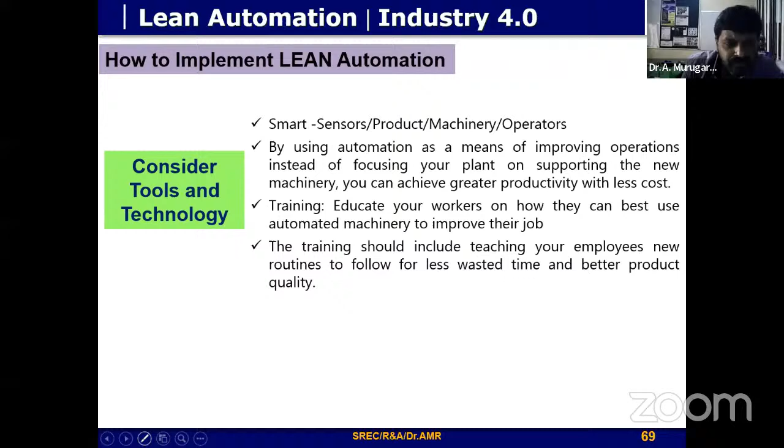These are three important steps when talking about the lean production point of view. Now coming to one of the major frameworks, most of them are working with this one when talking about the lean automation point of view, because when the order happens from the marketing point of view...

How you use the Kanban system, Kaizen, and we have to make different kinds of servers which capture your entire system, connected with your network layer, where it connects all your sensors and the start and stop of all your programming and human machine interfacing software, HMI systems, connecting in the cyber physical system. That's what we call CPS.

CPS is now emerging like anything in all industries. This particular framework will connect to all your signboards, all your visual controls, all your sensors, and all the controls of your system.

So to take the decision, you're sitting in the place to monitor the entire activity. Whenever you are making your framework of lean automation, mainly concentrate on how each and every sensor can cope up with or enable the different systems, how it can easily communicate. It's a plug and play kind of thing. How these hardwares, drivers and protocols can easily adjust while interfacing with other systems.

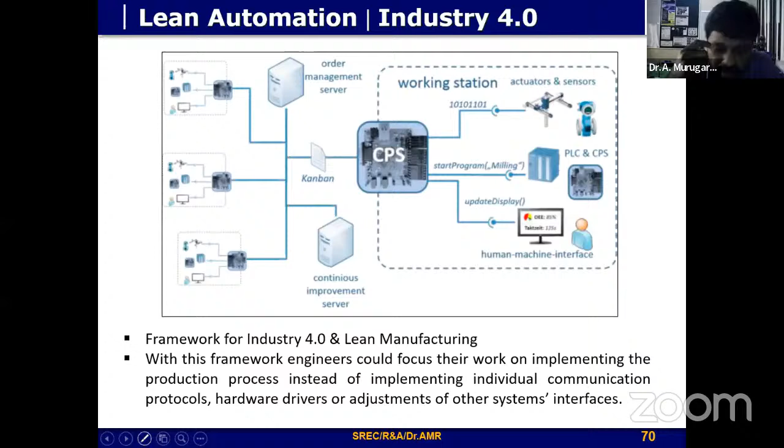Such a way you have to frame your work, whatever you're choosing, because in lean manufacturing you can say you can use this particular machine or sensor, but how do you adapt to interface with the existing system, what's the accuracy, what's the range. So we have to ask these questions.

So this way we have to start our lean automation with the current framework. One simple example is a lot of workstations. One problem statement was given by L&T Technologies, Techgium, asking for a modular workstation for low cost automation, instead of a person taking a two-handed process chart, how effectively can you use the tool whenever needed, whenever the product changes online.

Whenever you are changing your system or product based on customer need, you're automatically driven to take those respective tools. So the major thing is you have to minimize your setup time, and your workstation has to be adaptable to a modular structure where you can use it for different applications or different components.

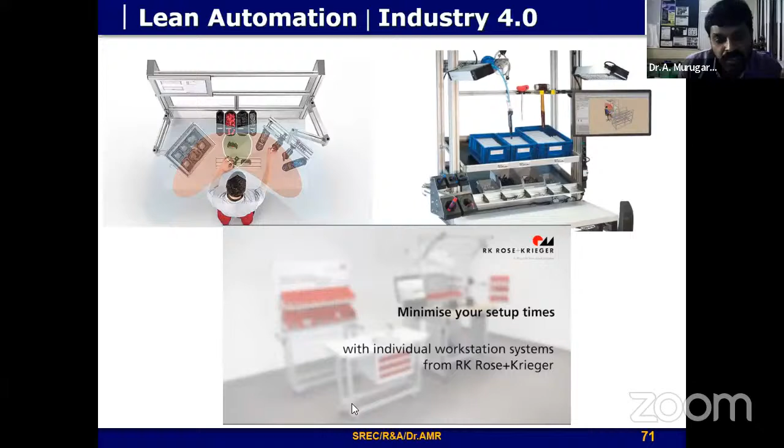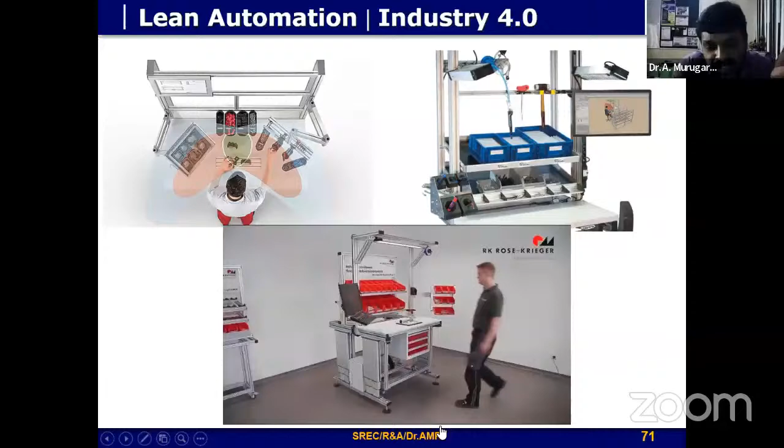So another video, if you could see here, a flexible workstation where all are combined together into one particular station. So modular adjustment tables, height adjustment tables come into the picture.

They have to work with different kinds of products for customer needs, because the customer wants maybe a different shape, different size - since they have women workers or male workers, depending on height, adjustments are very important. That's the way you have to design with lean cost - that's what they're always thinking, the lean way.

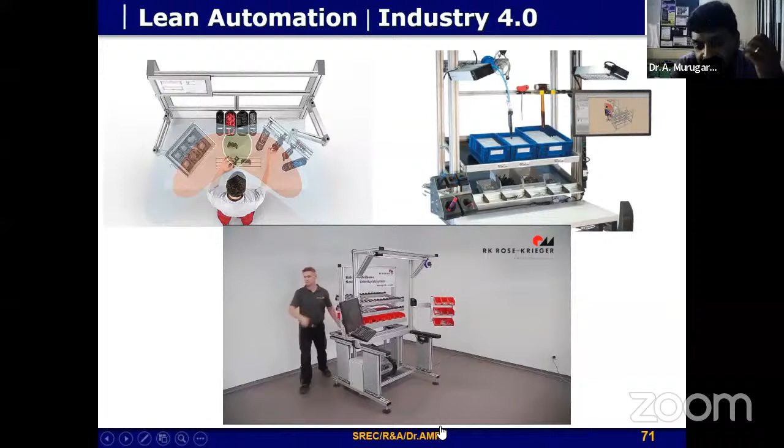That's what they are making - these different modular workstations easily configured into the system. This is one of the most important things companies are looking at nowadays in the lean automation point of view in Industry 4.0.

As I told already, Industry 4.0 with lean production using Kanban and the main industrial principles needs a smart operator. One technology we call augmented reality, where they give you training on what's going to happen in the remaining cycle time of this particular product.

Based on your wearable devices, the smart product will know everything and show it in your dashboard - where it stands, which station, what's the process condition, everything about the smart product. Smart machines will always interface with your system, so it will immediately indicate failures and defects if any are there.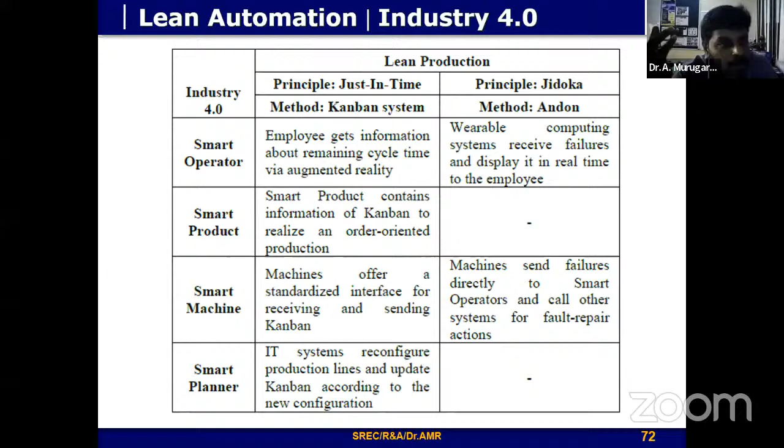Then the planner is one of the major elements here. Now with a number of algorithms, if you give the information, it will give you new arrangement and scheduling automatically - that's what algorithms play a major role for the IT people. IT systems reconfigure your entire production line within this simulated time. So smart planners, smart machines, smart products, and smart operators will lead into lean automation in the current industrial scenario.

So lean is a proven method because 3 to 4 decades before, without any investment, they started with the lean thinking point of view, systematically making approach to eliminate waste and resulting in good production.

But as I told, it's not a full manufacturing program confined only to shop floor employees - it may work from each and every stage of any process. So lean is every system, every process, every employee within the organization. Industry 4.0 and lean production do not eliminate each other.

So together they can add value to the customer and the users, whatever may be there. Because we cannot avoid the transferring of existing Industry 4.0 solutions to lean production and implementing the cyber-physical system, because the future is like building blocks where each workstation should be modular, and based on your customer needs and based on the product we can change it. So we cannot avoid it, but the thing is how Lean 4.0, that's what they're talking about, the lean automation and Industry 4.0 will make better prospects in the current industrial scenario.

So it's always a journey of continuous improvement with perfection unattainable. So lean is one of the systems which can be implemented in each and every stage of any process. We have to think in the lean way.